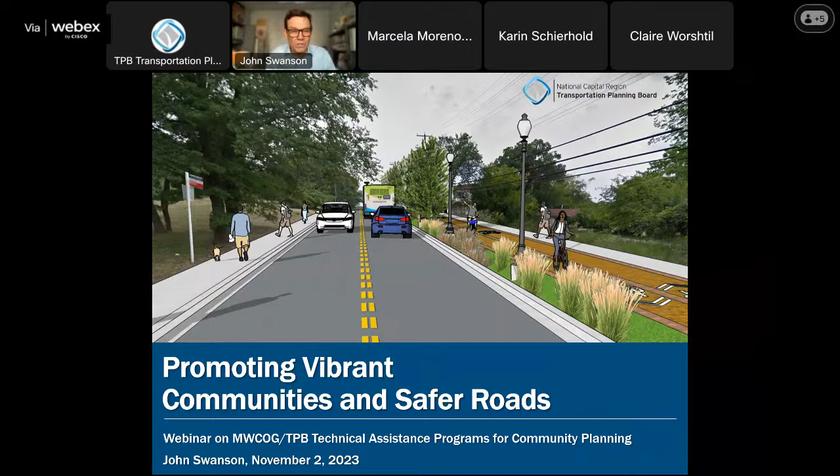Hi, I want to welcome you all. I'm John Swanson, I'm a transportation planner, and I work for the National Capital Region Transportation Planning Board here at the Metropolitan Washington Council of Governments. We are absolutely delighted that you've decided to join us today to hear about some recent projects that promote vibrant communities, active transportation, and safer streets.

We're going to be talking about the TLC program, as many of you are familiar with, but also a couple of newer programs, the Regional Roadway Safety Program and the Transit Within Reach program. The session is going to use a format called pecha kucha, which is Japanese for chit chat.

The format is a little bit like a conveyor belt, and it's a little nerve-wracking. Each speaker has 20 slides, and each slide will automatically advance after 20 seconds. So my presentation is using that pecha kucha format right now. This is the second time we've done it. It's fun, and it's a little bit nerve-wracking, as I said, but it definitely keeps things moving.

So, getting started with our programs. The TLC program was started in 2007. We have funded 177 projects until now. We have 10 that are going on currently. And as a whole, we think they've made the region a better place—more livable, more walkable, more multimodal—and they've helped local communities in countless ways.

The program has its origins in regional planning. We're a regional planning organization, and 20 years ago we were looking at big picture questions for metropolitan Washington. What if more development was concentrated and was mixed use? What if we built more transit and sidewalks and bike paths? Our analysis found that large-scale changes like those could make travel conditions better, but as many of you who are planners know, when we spoke to the public about these ideas, they had very practical concerns.

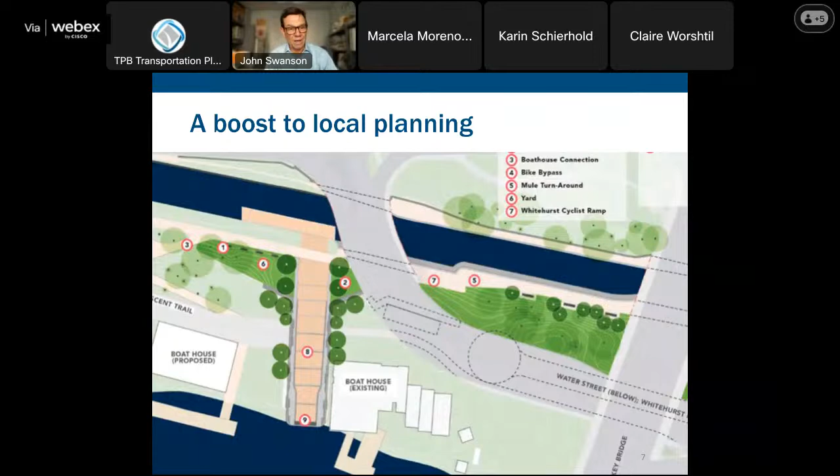We also saw that planners need a little extra boost to make good projects even better, or to explore innovative ideas or move important but non-urgent work off the back burner. So thus was born in 2007 the Transportation Land Use Connections Program. We use a very simple model. These are consultant-led projects, quick turnaround, 6 to 8 months, and pretty small, up to $80,000. We fund planning or design.

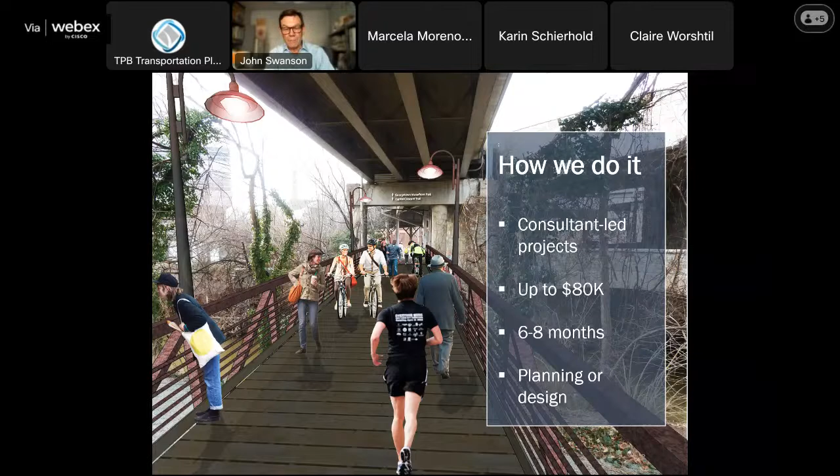A few years ago, we set up a sister program to TLC, the Regional Roadway Safety Program. It uses the same model, and we're going to be hearing about one of those projects later in the presentations. We hire consultants to do planning or preliminary engineering work. Again, the goal here is to plan projects that are going to make a real impact in people's lives.

When it comes to safety, that is really a pressing concern. I think a lot of us know that safety trends have not been going in the right direction in recent years. Fatal crashes on our roadways have increased each year since 2015. This was a reversal from the decline we'd seen between 2005 and 2013. And this is a national trend, not just a local trend.

A few years ago, we funded and conducted a regional study that identified strategies to reduce fatalities and injuries. Based on those strategies, we established the Regional Roadway Safety Program to fund short-term projects to make our roads safer, particularly for people who walk and bike.

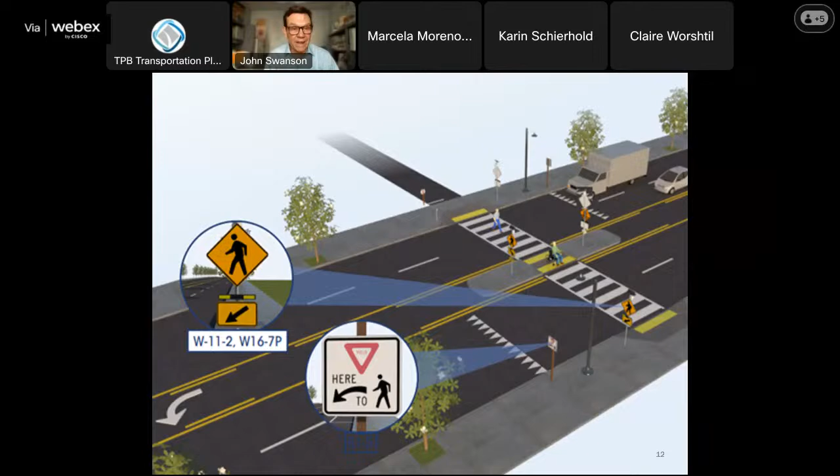So in the past few years, we funded 22 projects that take very practical steps, like you can see in the picture here: planning for infrastructure improvements for intersections, sidewalks, lighting, signage, designing new guidelines and standards at the jurisdictional level, conducting safety audits, and analyzing crash data.

Finally, I'm going to tell you just a bit about a third program, the newest, Transit Within Reach, which we just set up a couple of years ago. The idea for this one is simple. In principle, in this region, trains and buses should be within reach for lots of people because more than half of the region's job growth over the next decade is expected to be within a quarter mile of high capacity transit. And yet, even where transit is physically close, it's often not within reach if you walk or bike.

Sidewalks are missing, crosswalks are unsafe, trails and paths are yet to be built or inadequate. So the Transit Within Reach program was set up to fund preliminary engineering or design for pedestrian and bicycle improvements. Again, we're using the same model of technical assistance that we use for TLC. Our board just approved 3 new projects, and you can check those out on our website.

As you can see, these programs fund local projects, but I really want to emphasize that these are regional programs. That's why we're hosting this webinar. We want to share information, and that's why we have developed this awesome new database, which has just gone live in the last week or so, where you can look at all of these projects. You can search by primary topic and download the reports and really dig deep.

I also want to mention an important announcement. Every year we do a solicitation for applications for the TLC program and the Regional Roadway Safety Program. We're combining those application processes again this year. It's going to be in January and February. There's an abstract opportunity if you want to try out an idea.

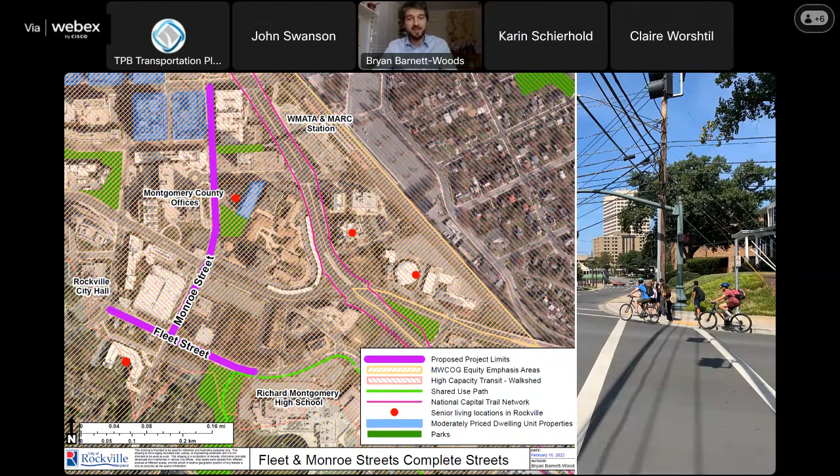So let's begin. How did we choose this project? This project is close to town center and the Rockville Metro Rail Station. It's within an equity emphasis area and a high capacity transit walkshed. You can see the streets in purple, Fleet and Monroe. They connect to the Metro, a future BRT stop, the County Executive Building, Richard Montgomery High School, Mount Vernon Park, Rockville City Hall, and a trail that connects to the Carl Henn Millennium Trail. So this is really great for multimodal access.

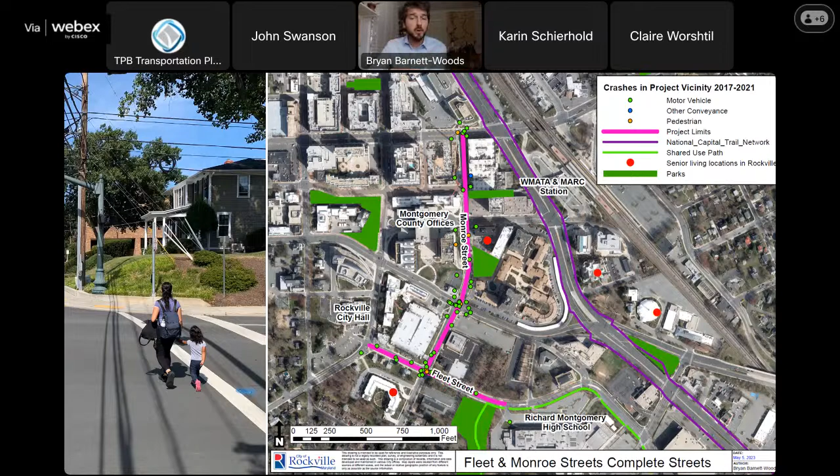The green and blue dots here show crashes that occurred between 2017 and 2021. There wasn't a fatal crash, but there is certainly room for improvement for all modes. Fleet Monroe regularly receives service requests from the public related to motorists not yielding and pedestrian and speeding from pedestrians. So adding complete streets has a safety benefit as well.

What are our project goals? First, what complete streets improvements can be made? And we want to make sure they're made and it's a functioning transportation network. And if that's possible, what will they look like?

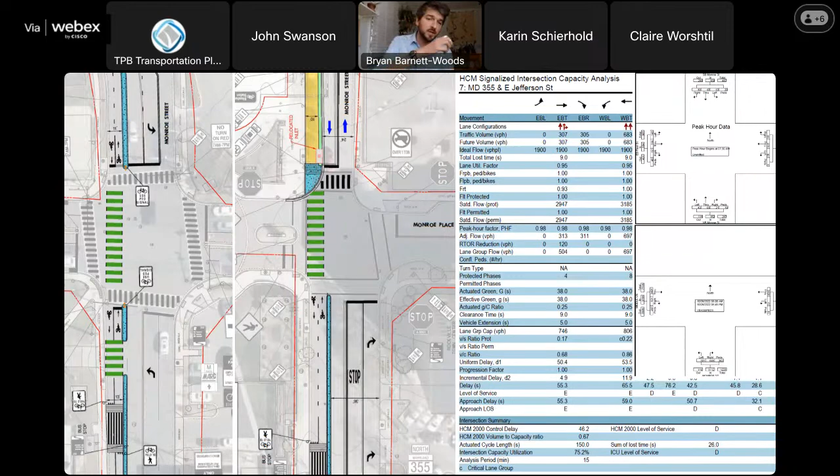This leads to two straightforward deliverables. The first is a traffic impact analysis, which you can see on the right. If we plan to implement any complete streets improvements, how will it impact the roadway? Will intersections fail? The second is, what are the conceptual plans for alternatives? What would the project look like on the street? Both are important. We need to understand traffic for public buy-in. We need the concept plans because they'll show us how much road space we need.

So for the analysis, we looked at turning movement counts, pedestrian counts, bicycle counts, right-of-way availability, sidewalk, roadway lane widths, vehicle delay, queue lengths, all of it. It turns out that there's additional capacity along these roadways. We also looked at on-street parking, and there is some street parking on both streets that would be impacted.

So what do we find? The biggest issue here, right-of-way constraints, are really going to limit what we can do. The city doesn't have the ability to obtain more right-of-way, and the travel lanes are only 11, 12 feet wide, so not a lot of extra space to play with. Good thing there's extra roadway capacity, because this means the best way to make improvements is to repurpose a motor vehicle lane. And how do we do that?

The first option is a bicycle path that's up on the curb. This is more like what we think of a shared use path, and you can see actually in the little picture as a person and a bicyclist. But keep in mind, this pathway is in addition to the sidewalk. It's bidirectional and it would run alongside the south side of Fleet and west side of Monroe.

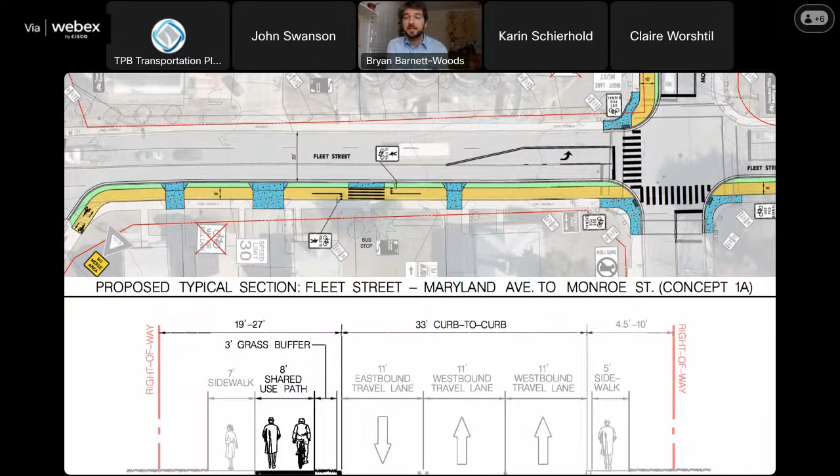The other alternative is a bidirectional cycle track. This is similar to some of the bike lanes they have in DC. Like the path, it would be on the same sides of Fleet and Monroe, but it's slightly wider and it's within the curb to curb on the street.

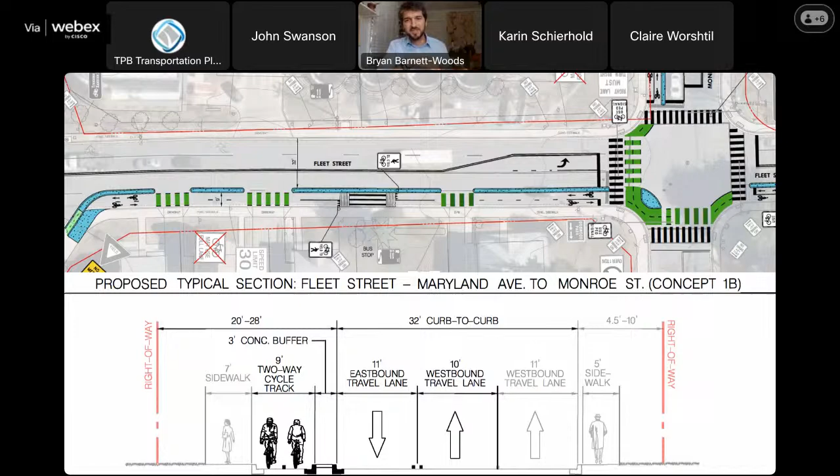So this is an on-street facility, which means it's going to need intersection differences in signals to help advance those bicycle movements. These proposals are similar. The right-of-way constraint is real, and there isn't enough space to provide protected lanes on each side of the street, which might be the preferable option. A standard striped bike lane could fit, but it wouldn't address bicycle safety needs.

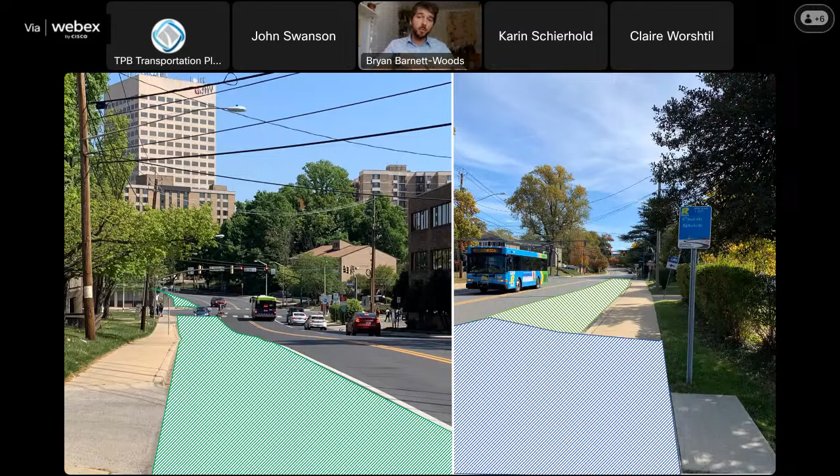So here, the green is what it looks like if we were to repurpose a lane. The blue is where an extended and at-level bus stop would be. But the projects do differ at some key points. First is cost. A new path is more than double a cycle track. Second, a bike path would impact more driveway aprons and drainage inlets. And then lastly, the path option would have less complicated signals at the intersections than the cycle track would.

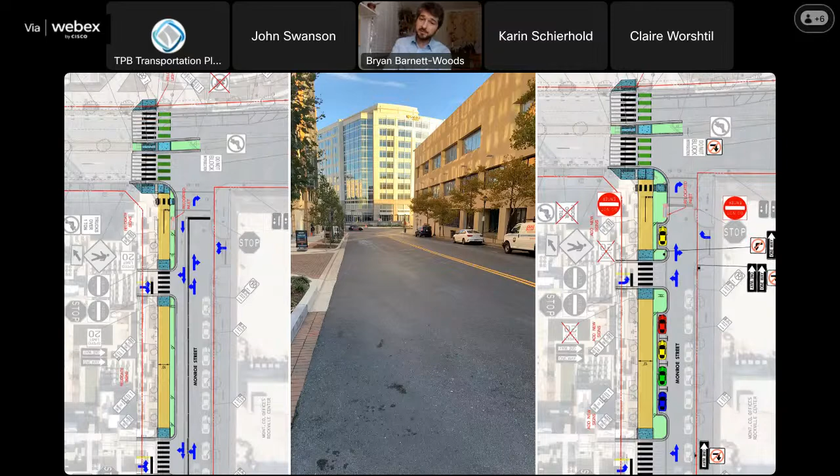On top of these options, there's a subset of options for the northern end of Monroe Street, which we see here. There's very low traffic on this street, so there's an option to make this section one way. This would allow for 5 parking spaces to remain, which you can see on the right. Alternatively, we can remove the parking lane and keep the two-way traffic.

We coordinate with other agencies, and this is important because we want everyone to be on the same page, and since the city can't modify non-city intersections, we need their concurrence. We work with Montgomery County Department of Transportation Ride-On, their transit service, and the State Highway Administration, who own the Monroe-Jefferson intersection.

State Highway doesn't yet have approval for a bicycle traffic signal, so we need a more complicated signal phasing to advance bicyclists. There are options, but we really do need to take a deeper dive to figure it out.

Ride-On, the bus service, requests that all bus stops be wide, at-level bus stops so that both doors can be accessed, and that bicyclists yield to pedestrians.

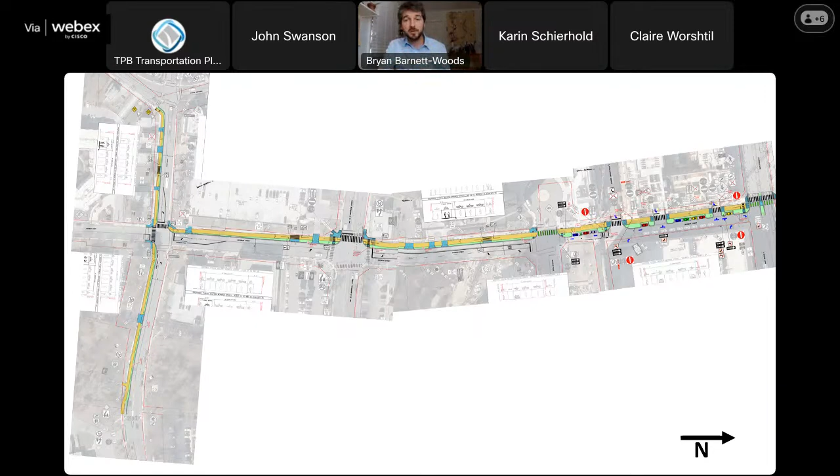So now that we have a preferred alternative, what's next? With the support of MWCOG, we were awarded funds for the FY24 Transportation Alternatives Program to undertake 30% design. This project will prepare preliminary design plans, look at that East Jefferson and Monroe Street intersection, and put together a much more detailed cost estimate. This is all information we're going to need if we want to move this project to future design and implementation.

In all, this project will put the metro station, the bus facilities, the future BRT closer to town center, county offices, residents, and a high school. It's going to leverage surrounding land uses to create a better multimodal transportation infrastructure. And with that, I thank you for your time, and I'd be happy to answer questions.

Thank you, Bryan. Excellent. We're going to actually hold questions to the end, keep things moving. That was a really great intro to the work you're doing in Rockville, and also to the TLC program, the Regional Roadway Safety Program.

This is really a very clear example of a typical project that we do to build vibrant communities and leverage a lot of other work that's going on out there. So we're going to move now to a less typical project. Every year or so we fund one or two really innovative projects, and I think the next one is a great example of that. It's looking at micromobility and a micro hub, and looking at freight particularly. This is something that came to us, and it was a little bit out of our normal bailiwick, but I'm certainly very excited to fund this.

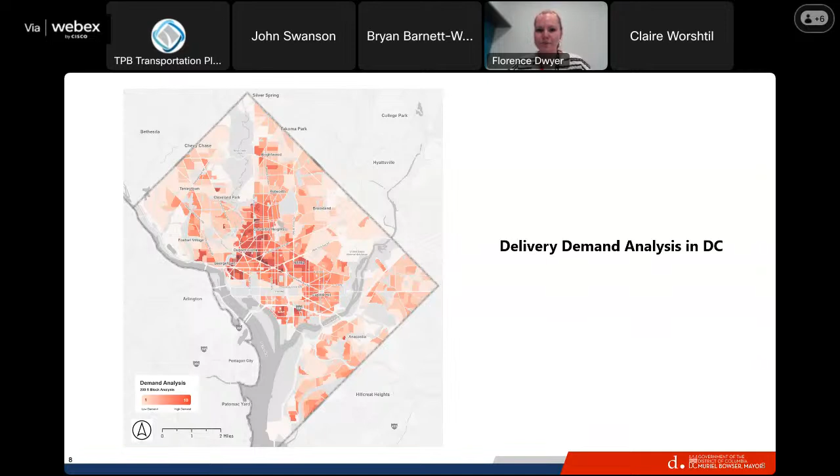These next few slides show maps from the siting analysis. This first one shows the composite delivery demand analysis scores, which estimates the frequency and quantity of delivery requests based on factors of population density, employment density, and housing unit density.

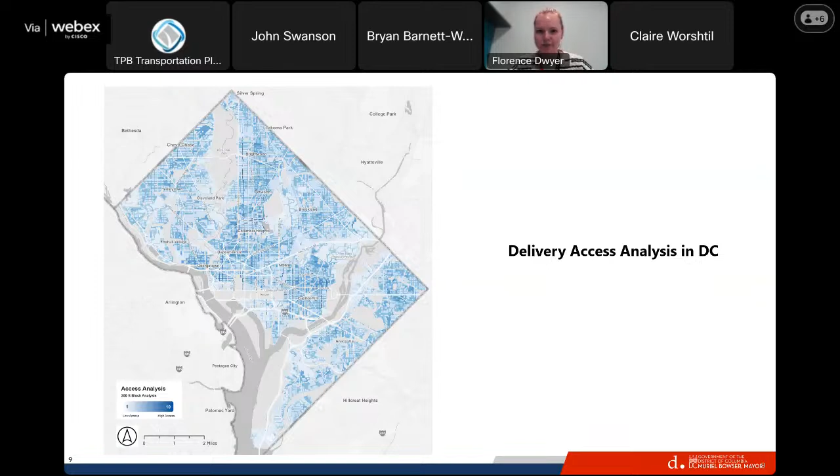This composite delivery access analysis score estimates the ease of how deliveries could flow in and out of certain areas of the city. Because a microhub is meant to have an inflow of larger vehicles bringing parcels to the hub and an outflow of smaller vehicles picking up parcels and delivering them to their final destination, the hub must be located where it's both convenient for trucks and large vehicles to drive, and safe and convenient for smaller vehicles to finish the delivery.

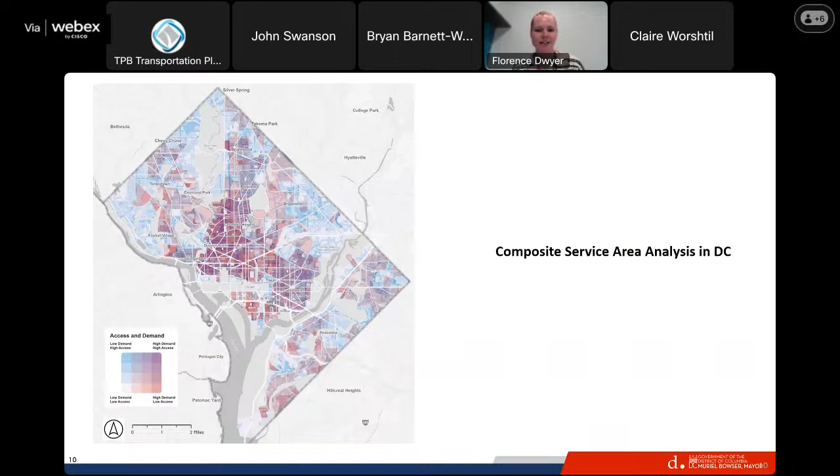This composite service area score combined both those access and demand variables to show where the highest demand score corresponds with the highest access score, and those are the areas shown in purple there.

Finally, we have our equity map. We decided equity is also important to consider in the site selection process for this project. This equity consideration analysis shows areas of the city identified as high on the transportation needs index by MoveDC, with high instances of asthma and reported high concentrations of diesel particulate matter.

Now on to some of our findings from this study. One was that microhubs work best for deliveries that are non-perishable, small in size and weight, and have a short last mile delivery trip. Because of this, parcel deliveries were determined to be the best use case for a microhub in the district. Another finding from our consultation with stakeholders and best practice research was that delivery companies do not want to share microhub space.

They want their own dedicated space. Additionally, we found that in an ideal world, a microhub would be around 8,000 to 10,000 square feet. This would give adequate space for loading and unloading of a truck or van, vehicle parking and battery charging, and employee amenities like restrooms, locker rooms, a kitchen area, office space, and other storage needs.

Diving into our next steps: throughout this fall, we're continuing our efforts to select a site for the microhub and create an operational framework for this pilot. This feasibility study was funded through a TLC grant, and we got additional grant funding to try to implement this pilot. Now we're hoping to go through any necessary permitting processes and onboard an operator this fall and into the winter, with our goal being implementation of a pilot in early 2024.

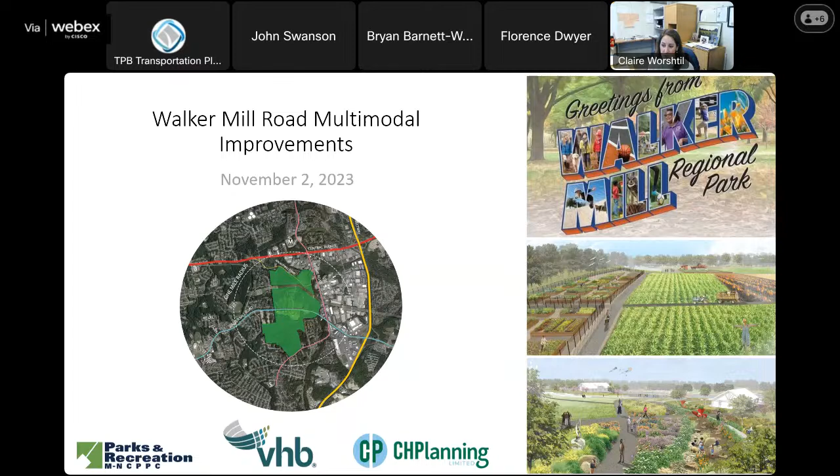Walker Mill Regional Park is one of 4 existing regional parks in our system. We completed a master park development plan for Walker Mill in 2022. Walker Mill is the only regional park located inside the Beltway.

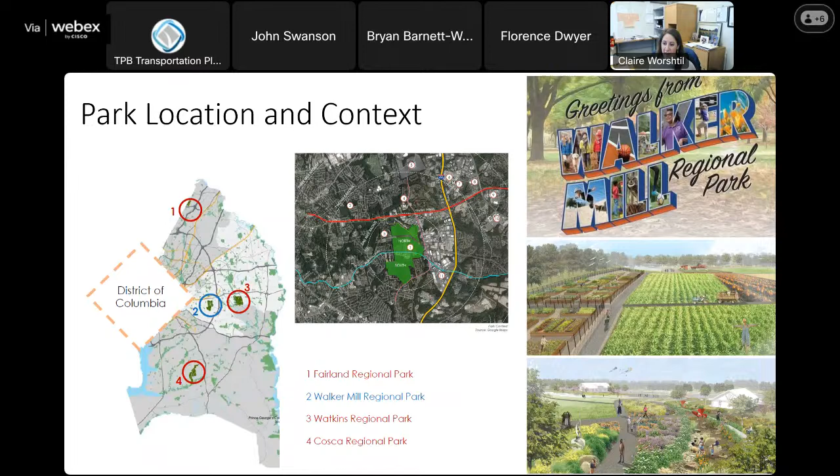It's 504 acres, divided roughly in half by Walker Mill Road, and a master plan for the south side of the park was completed in 2004, and that side's undergone a multi-million-dollar renovation over the past 10 years. This master park development plan largely focused on the undeveloped north side of the park. The only existing amenities on the north side are the historic Concord Manor House and a small community garden.

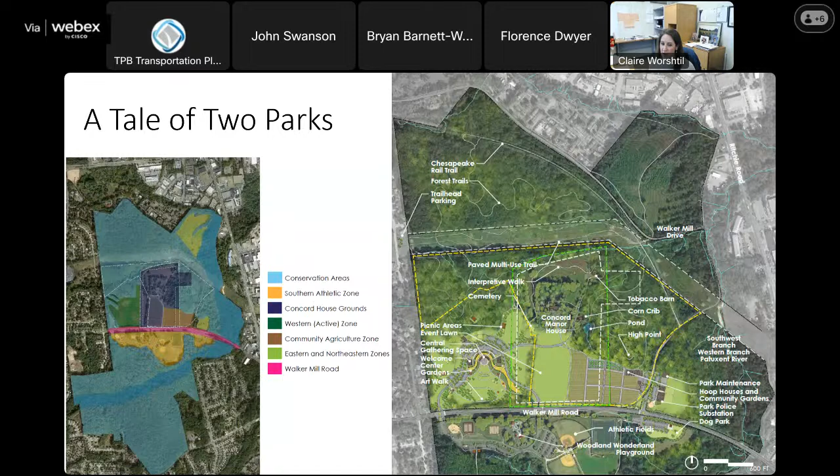The plan divided the park into activation zones and identified Walker Mill Road as its own activation area, as it divides the park and is the only major access into the park for cars, bicyclists, and pedestrians.

The Concord Museum will share the history of the park as the plantation, as well as the enslaved who lived there and worked on the property.

In order to advertise and enjoy this historic setting, slower speeds, ornamental fencing, and gateway signage are ideal elements along a roadway. A comfortable walking environment is also important, as only accessible parking will be provided on site. All other parking will be located away from the historic property.

The plan is to maintain the historic uses and viewshed by building upon a historic agrarian use for the land and created both a community garden and an urban ag zone. This will generate additional traffic to the park on weekends for the envisioned farmers market.

And the western zone will probably be the most active part of the north, where we envision a visitor center, ample parking, botanical gardens, large pavilions, and spaces for entertaining and play. This is the area that will see the most traffic to the north coming through its roadway entrance.

Finally, the robust trail system is what ties all of this together. There are approximately 9 miles of new trail that will take users through various sections of the park and connect to surrounding communities. The trail also takes advantage of the Pepco easement, which has some ideal terrain for mountain biking, as well as the Chesapeake Beach Rail Trail.

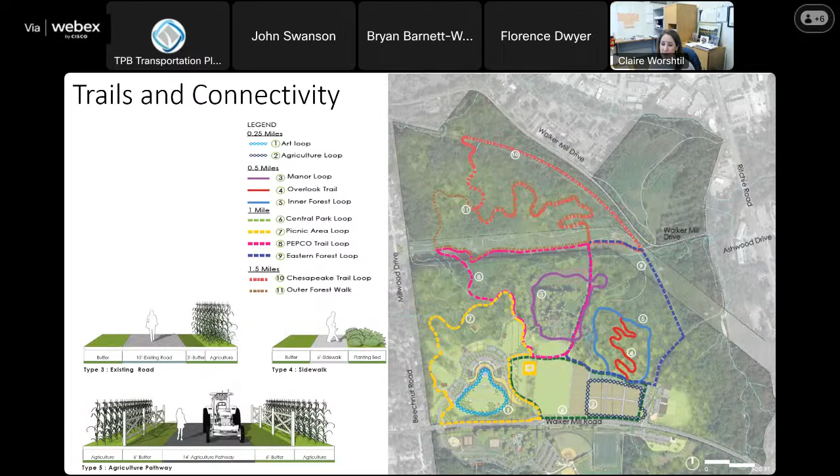This makes it even more important for residents to be able to access this park safely by bicycle and on foot. Walker Mill Road was built for vehicular traffic with limited sidewalks and an unprotected bike lane and cars that travel at very high speeds.

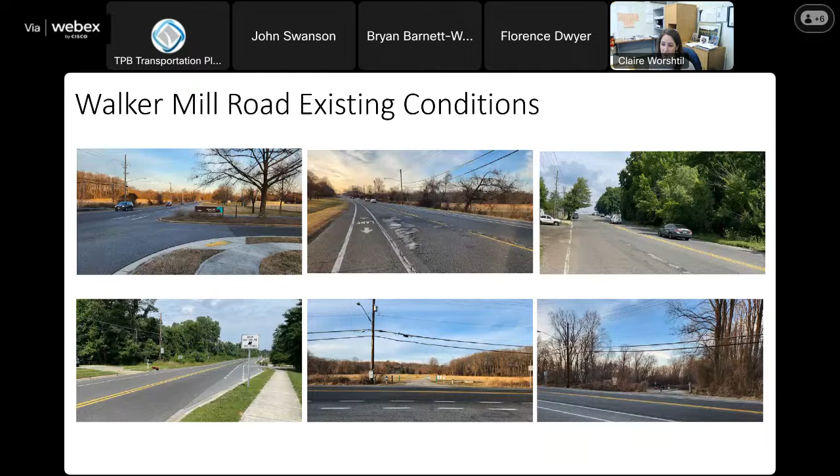As we activate the north side of the park, it'll become common for visitors to want to walk from the active side on the south to the more passive and reflective uses on the north. Bicycle and pedestrian safety is essential for this park's long-term success.

The plan envisioned a gateway to alert drivers that they're entering a park setting. Additional traffic calming measures like hawk signals, protected bike lanes, pedestrian lanes, and roundabouts were also recommended.

But we needed a skilled team of experts to help us take this key component of the park to the next level and really understand the constructability of these recommendations.

So the team broke their recommendations into short-term and long-term recommendations. Things like roundabouts and traffic signals take a long time to construct, and we need solutions that we can implement more immediately while waiting for more substantial funding.

They also included information on coordination complexity, as some require multiple entities to implement, and the stakeholders who will need to be involved. Short-term recommendations included the installation of additional signage and markings, creation of protected on-street multi-use paths, gateway signage

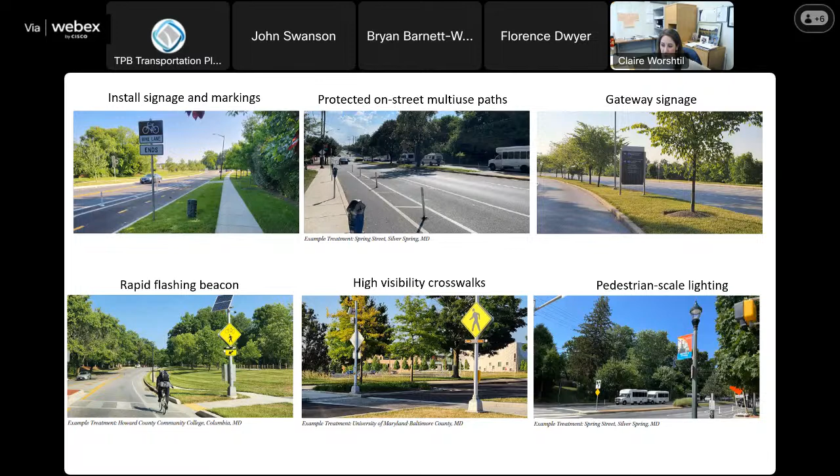to alert vehicular drivers that they're entering a park setting, rapid flashing beacon for pedestrian crossings, high visibility crosswalks, and pedestrian scale lighting to enhance safety.

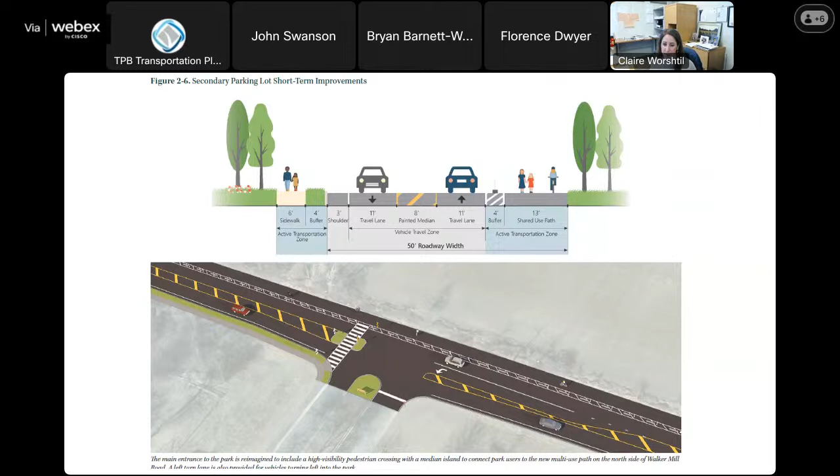With travel lanes narrowed to 11 feet in width to create the shared use path, additional width is available for widening the existing sidewalk on the bridge.

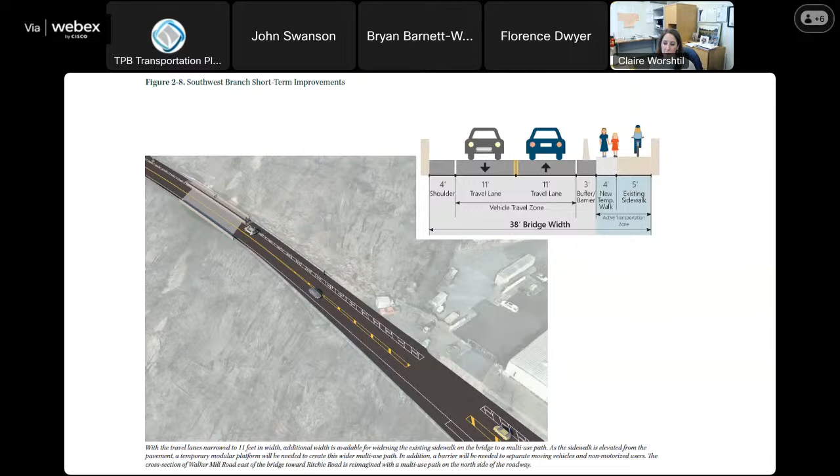As the sidewalk is elevated from the pavement, a temporary modular platform would be needed to create a wider multi-use path. In addition, a barrier will be needed to separate the moving vehicles from the non-motorized users. This will help residents get from the commercial areas to Walker Mill Regional Park.

We can then consider the long-term recommendations.

These recommendations generally will require 5 years or more to implement because of the high cost, level of design and construction complexity, and level of coordination needed among various agencies. They include the installation of traffic signals, construction of 2 separate roundabouts, a right-in, right-out entrance, a separate pedestrian bridge to the east, and off-street multi-use paths.

The plan doesn't recommend a menu of solutions, but recommends that all of them be layered and implemented over time in order to create the best multimodal experience possible.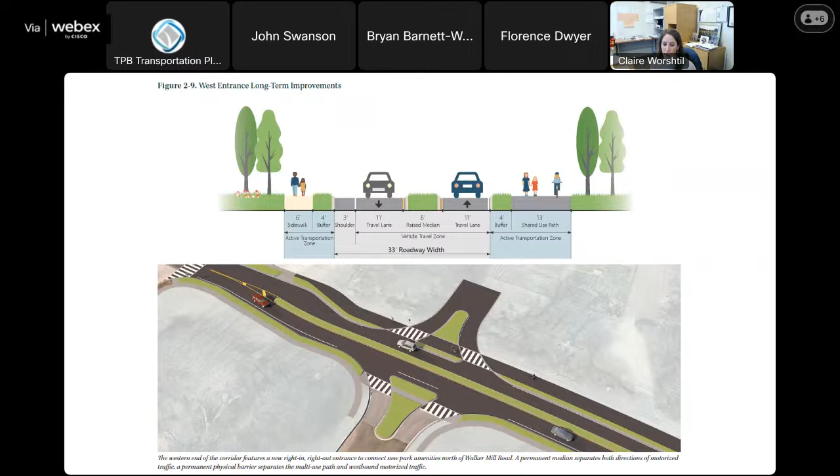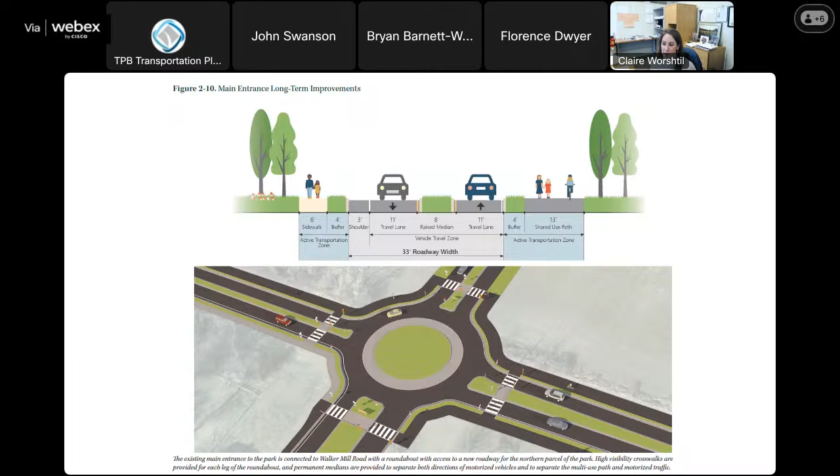The raised median area could also become tree lined, further enhancing the aesthetic of the park.

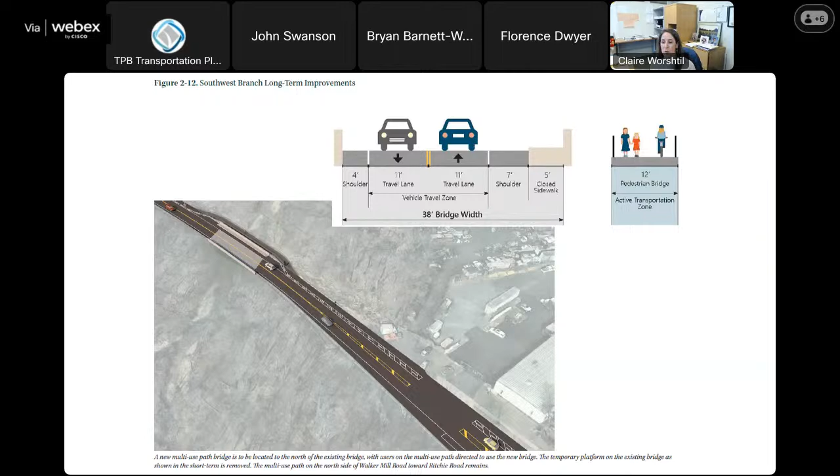And finally, a new multi-use path bridge is to be located to the north of the existing bridge, with users on the multi-use path directed to use the new bridge. The temporary platform on the existing bridge, as shown in the short term, would be removed. This would essentially take users off of the roadway for the extent of the bridge and then back onto the roadway.

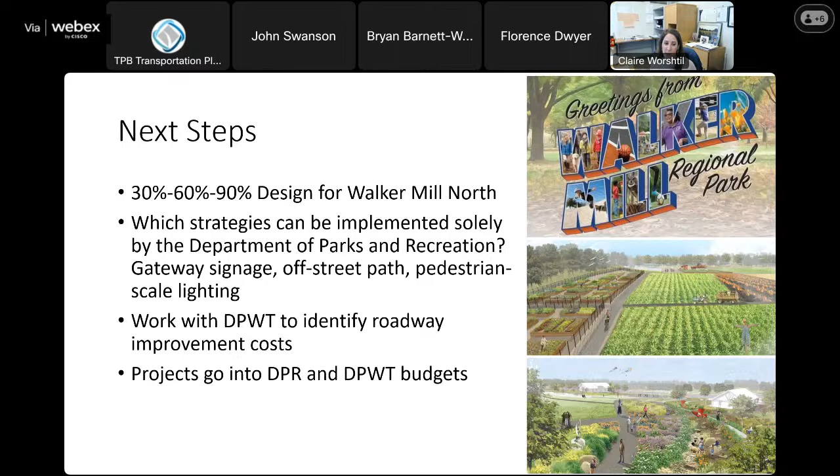Our next step in this process is to engage a design team to take the master plan for the entire north side to 30%, 60%, and then 90% design. As we do that, we'll begin to implement strategies that can be solely implemented by the department because the upgrades happen on our property. This might include gateway signage, building on and off street paths, adding pedestrian scale lighting, and then we'll work with DPW&T to identify costs for some of these improvements and identify which agency has responsibility to fund them.

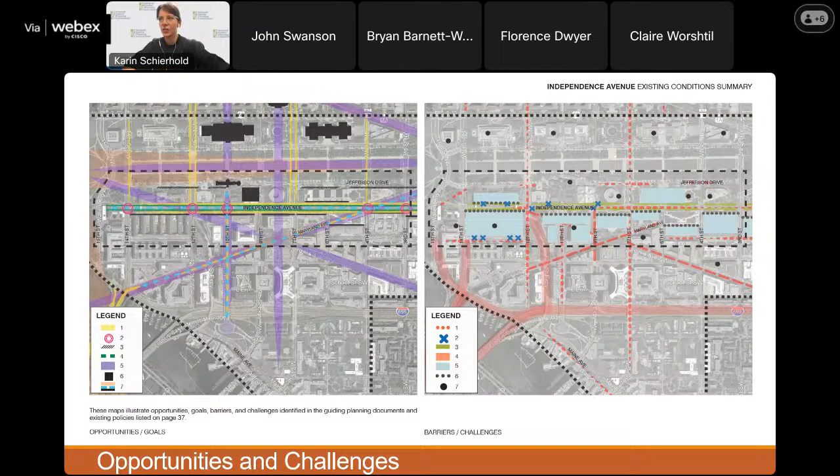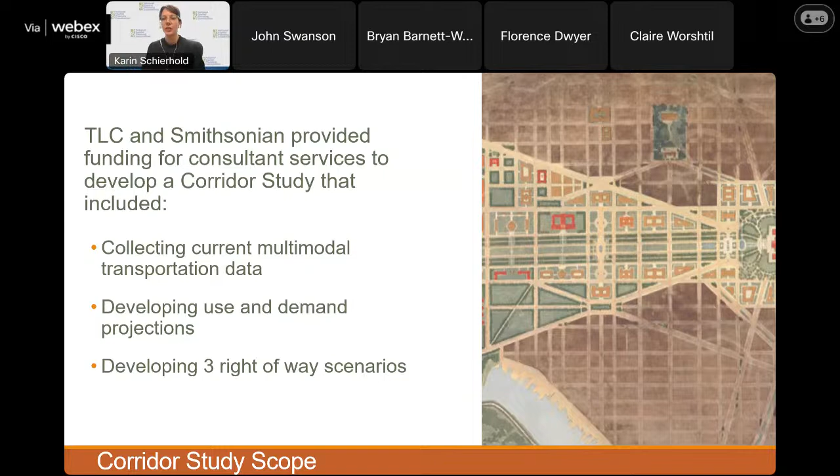So NCPC started doing some initial background work on Independence in 2019, essentially an existing conditions report, and we held a few stakeholder workshops to identify some of the opportunities and challenges in the area. With that base of understanding, DDOT and NCPC applied for TLC funding to support data collection as the first step. So these consultant services were to develop a corridor study that included collecting current multimodal transportation data, developing use and demand projections, and developing 3 right-of-way scenarios.

Objectives included identifying strategies to emphasize the avenue's unique character, ensure high-quality streetscape, and prioritize resiliency and sustainability, as well as safety and multimodal comfort and access. The study area is, again, Independence Avenue Southwest between 15th and 3rd. That includes intersecting streets, basically a block north and south of the avenue.

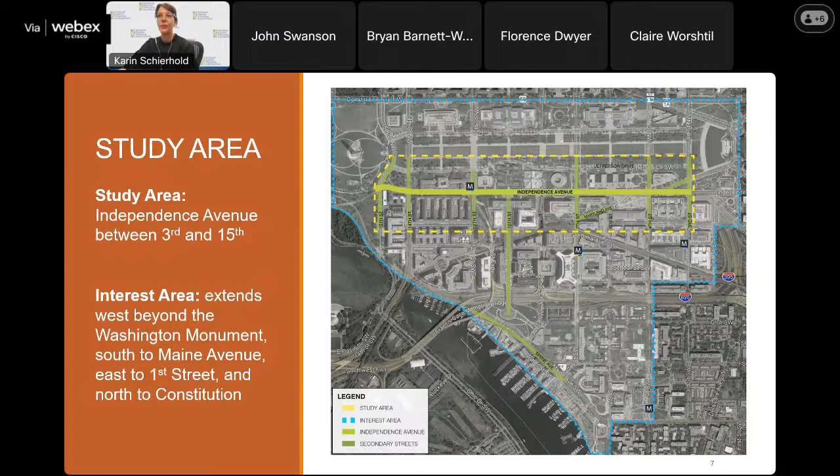We also considered specific intersections and connections within a wider interest area for their impact and influence on Independence Avenue. Kittelson started with an existing conditions analysis that used a synthesis of historic and current data to help inform this mid-to-hopefully-post-COVID scenario we're in.

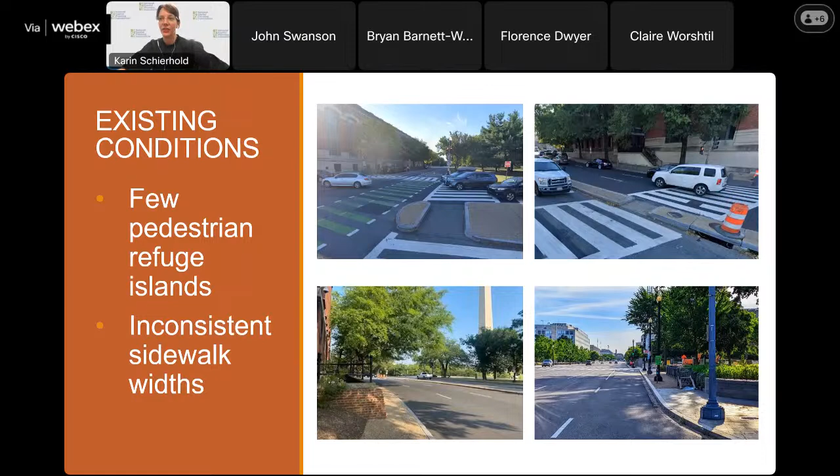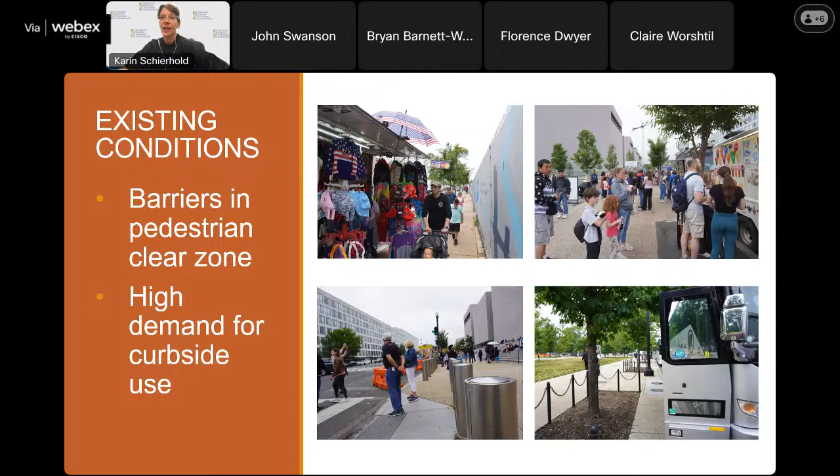Regarding the pedestrian experience, they found that intersections are generally very long with not a lot of pedestrian refuge, and sidewalk widths are inconsistent with several pinch points along the corridor. There are also barriers in the pedestrian clear zone due to construction, perimeter security, and vending, plus a very high demand for curbside use with tour buses, rideshare, pickup/drop-off, and vending all competing for space. There are currently no bike lanes, and due to a pretty meager tree canopy in places, there's not a lot of shade. Finally, it can be hard to navigate if you're not familiar with the area—there's no cohesive signage or wayfinding program.

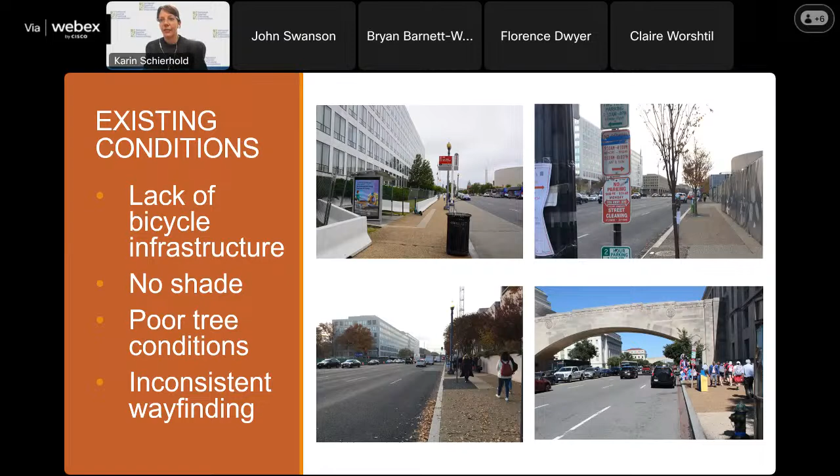Independence today is 8 lanes, 4 in each direction, with no bike lanes on this stretch. Sidewalks here average about 10 feet, and in some cases narrower, and many times the tree boxes and other streetscape elements are part of that area, which leaves even less room for a pedestrian clear zone.

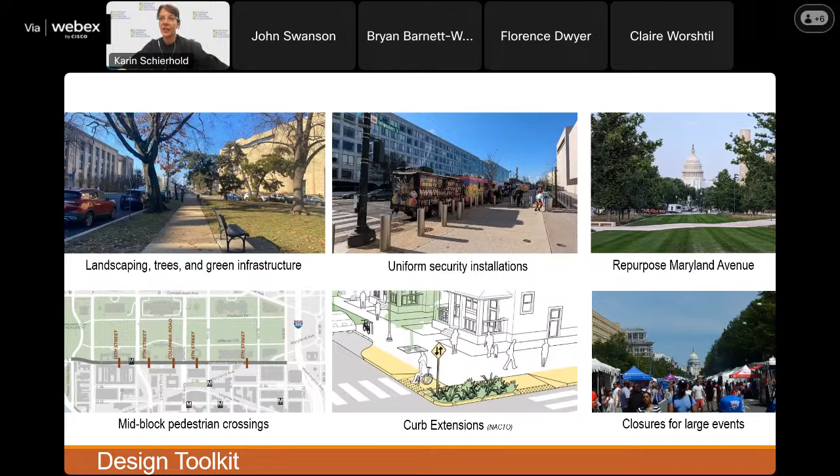Kittelson found that based on the data, Independence actually carries the load of a 4-lane roadway, meaning there's an opportunity to consider repurposing some of those existing travel lanes and reconfiguring the corridor's cross-section to prioritize non-motorized users, including biking, walking, using micromobility, and accessing transit. They also developed a toolkit of ideas to make the avenue more pedestrian-friendly and safe.

With that in mind, they developed 3 general right-of-way scenarios. Each scenario proposed a reduction of 2 lanes, maintained or increased the tree canopy to have a consistent double row of trees on each side, and left room for a left turning lane.

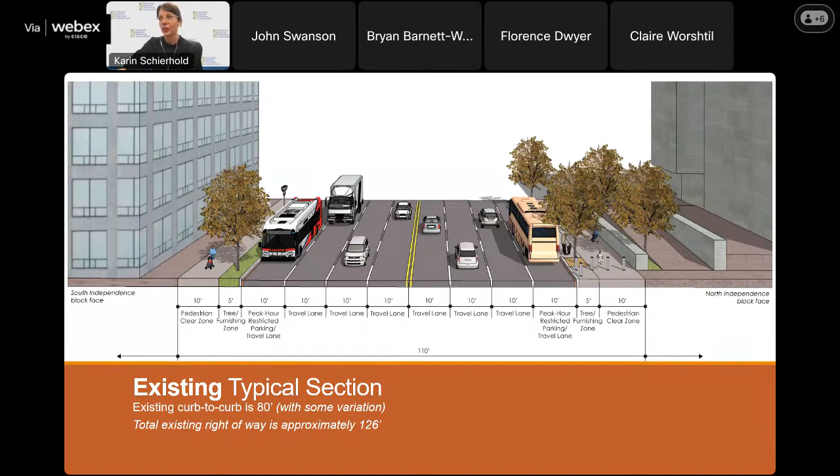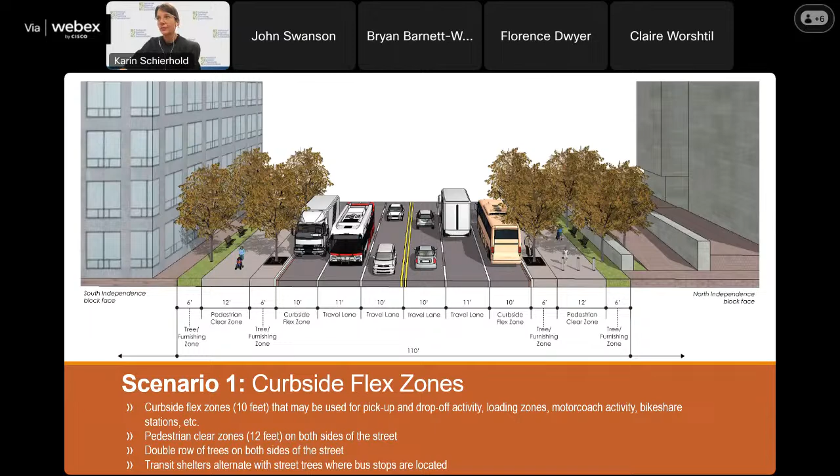They also looked at accommodating curbside uses and increasing green space and bike lanes. One scenario looked at enlarging the pedestrian area, keeping 2 through travel lanes, incorporating a flex zone that could accommodate pickup/drop-off, buses, potential bike share or vending, and maintaining a consistent double row of trees on both sides of the street.

Another scenario looked at using that excess space and putting it into a landscape median that alternates with the left turning lane, and enlarging the pedestrian area at the sidewalks, again with that double row of trees, plus a curbside flex zone.

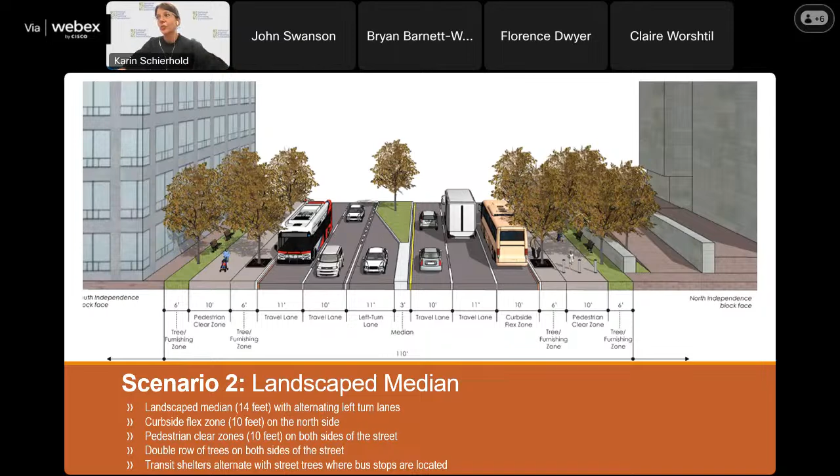They also did a scenario that looked at adding a cycle track at the sidewalk grade, keeping 2 through travel lanes, and some flex zones with additional landscape space. The trade-off being that a bike lane in that location would likely conflict with tour bus loading and vending.

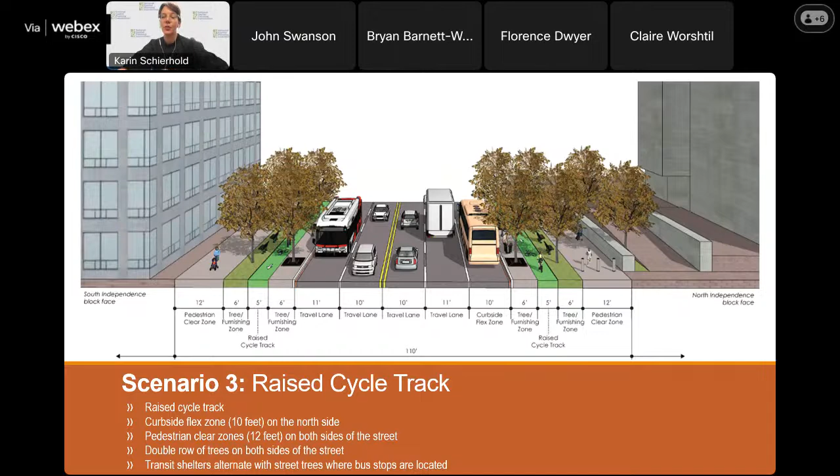This work is still in the very early stages, and since it's a district street, DDOT will be the entity that takes it beyond the feasibility stage. But for the next year, we're very excited to have the opportunity to further develop this study and start to engage stakeholders and build a case for future improvements.

Last month, we kicked off a contract with Kittelson to do another year of study and expand our understanding of the block-by-block needs along Independence and test some of these right-of-way scenarios. Smithsonian is also generously contributing funding to this effort.

This next phase of work will build on the TLC-funded study and develop a deeper understanding of the corridor by conducting an initial public life review to measure how the street is used, identify and hone in on curbside issues including loading and delivery zones, rideshare, and tour buses. We'll further detail the demand and flow data and analysis collected in the first study, which will help coordinate stakeholder priorities and start to establish a unified vision for the corridor and support for future improvements.

So that is Independence Avenue, and I'm happy to follow up or answer any questions after. Thanks.

That's great and super exciting. I think looking forward to seeing that real change happening in the hopefully fairly near future there. So—

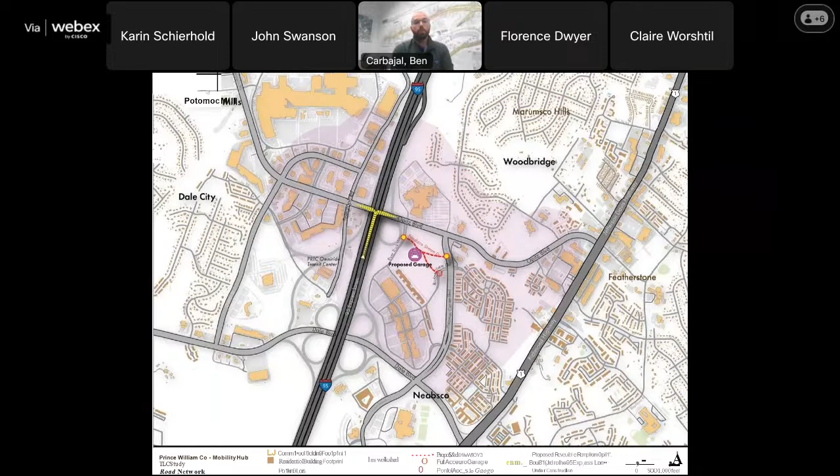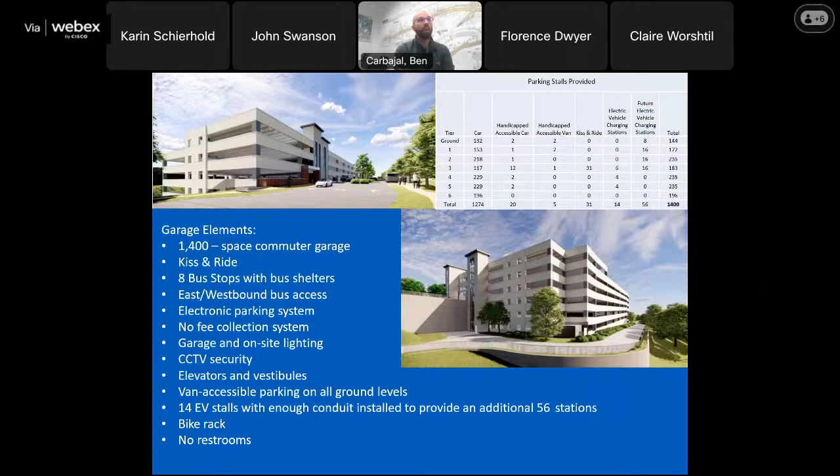The garage project is currently under construction with crews working to finish the foundation before the end of this year. The project will provide several amenities, including being OmniRide's transit hub for the region, free access to park, EV charging stations with expansion upon need, elevators and vestibules, van accessible parking on all ground levels, bike racks, and other pedestrian facilities.

The 95 Opitz project is constructing a south-facing ramp within the existing median on 95. We're excited about this project as it provides pedestrian improvements along the north side of Opitz Boulevard, safely reconnecting communities divided by 95.

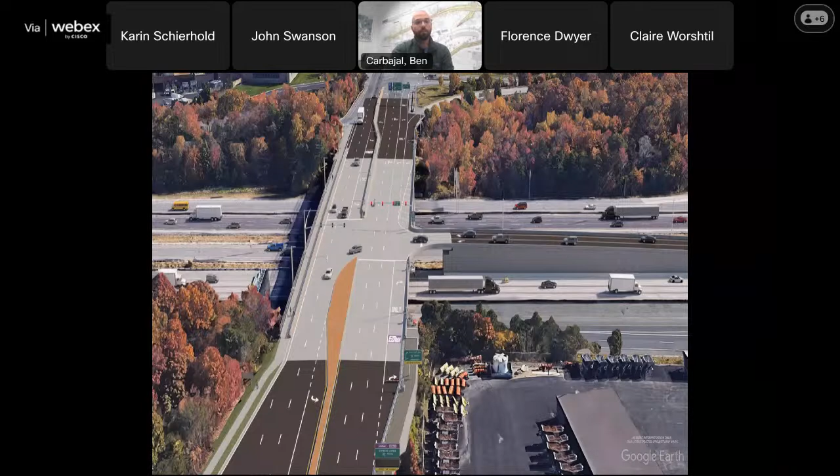The study area includes several census tracts designated as an equity emphasis area while also being in an activity center. The demographics concerning this study impact how we move forward with the recommended improvements.

I don't have time to go into each one, but based on 2019 census data, there is an average population density of 3,100 people per square mile. The town center has a density between 5,000 to 10,000 people. 99% of individuals who commute to the study area do not live within it. Furthermore, there is a significant population with limited or no access to a vehicle, making quality transit infrastructure essential.

Understanding mobility safety is critical for the county to decide where to prioritize improvements. As you can see, from 2015 to 2022, there have been several accidents, including 2 fatalities, along Opitz Boulevard and Dale Boulevard.

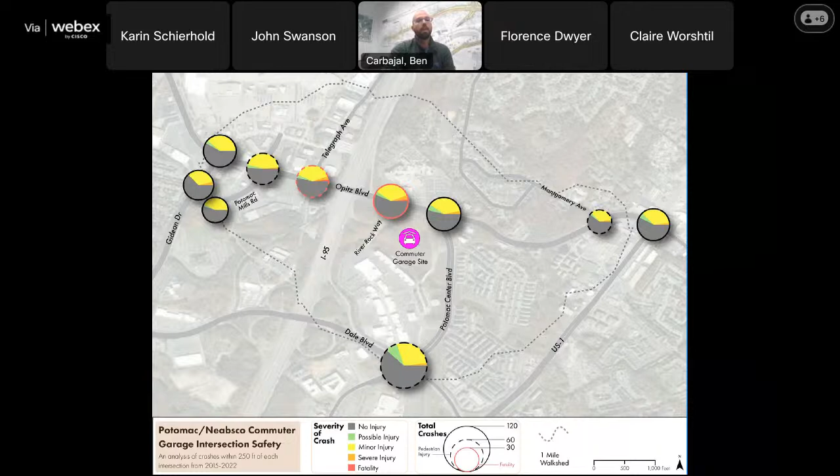Though most streets have sidewalks or shared use paths, there are gaps in connectivity, especially around Opitz Boulevard. Opitz and Dale crossing 95 are very uncomfortable and recommended to avoid for cyclists. There are bus stops along Opitz to the east of the garage with only street access.

With all the capital improvements occurring in the area, the county is actively coordinating with our partners to resolve these issues. This slide highlights existing pathways in solid green lines and pathway gaps illustrated by purple and blue dashes. These gaps are major hurdles needed to overcome to provide equitable access to these communities. VDOT's ramp project will resolve some of the issues along Opitz Boulevard.

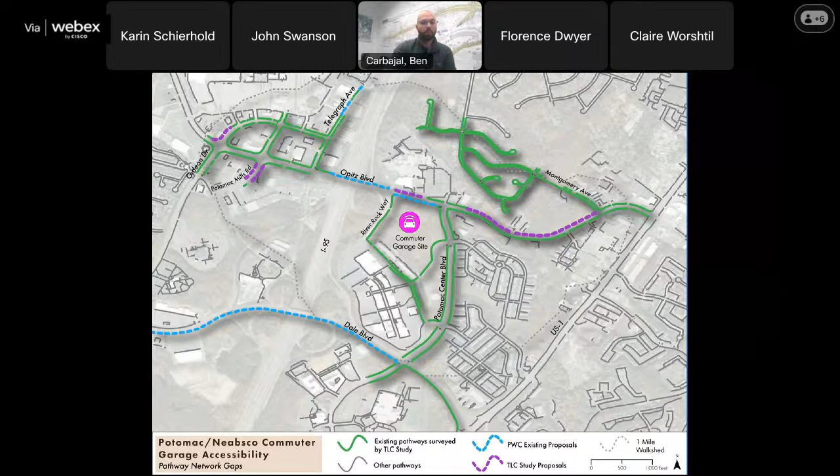This is a similar map to the last one I showed you, but it dives deeper into the planned pedestrian improvements in the area. Outside of the garage and ramp projects mentioned earlier, the county has the Neabsco Mills widening project to the south and the Route 1 widening project to the east. Both projects provide necessary pedestrian facilities.

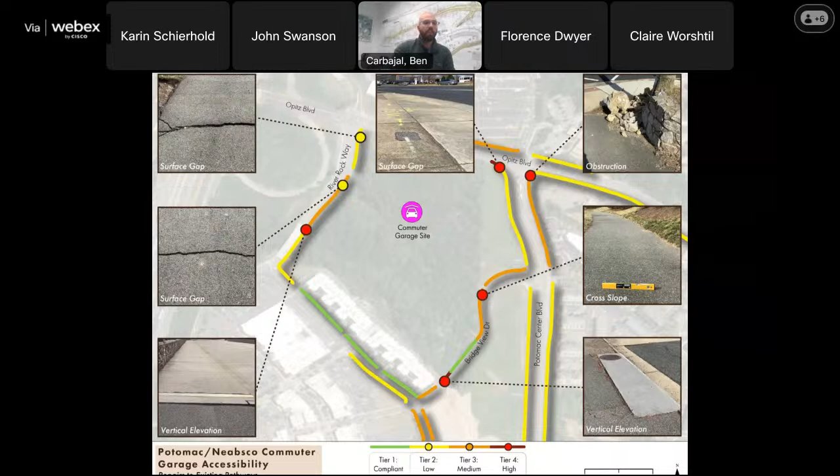KFH spent 2 months canvassing the area, surveying a total of 174 curb ramps, 99 crosswalk segments, and 129 pathway segments. Repairs and reconstruction of the existing pathways are required to meet ADA compliance standards. As you can see at the bottom of the slide, KFH provided a tiered ranking system to facilitate the prioritization process. Intersection improvements are needed throughout the study area to improve safety for all roadway users.

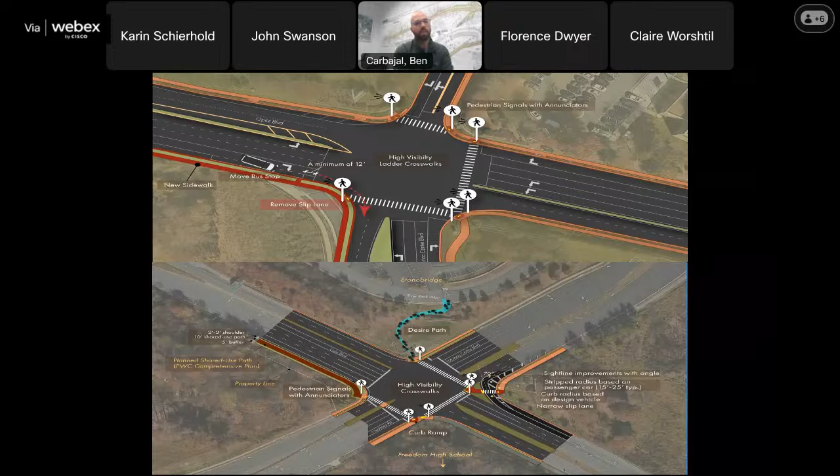Some recommendations include traffic calming, speed reduction strategies, and improving visibility. County staff will coordinate with property owners and VDOT to initiate these recommended improvements.

Going forward with the project is not as direct as seeing an issue and solving it. County staff will utilize this study to best inform the district supervisors to receive buy-in from them before submitting project funding requests to our state and federal partners. Some programs we will apply to in the future include VDOT's Transportation Alternatives Program, USDOT's Safe Streets and Roads for All, amongst others. If necessary, the county will support projects with local dollars.

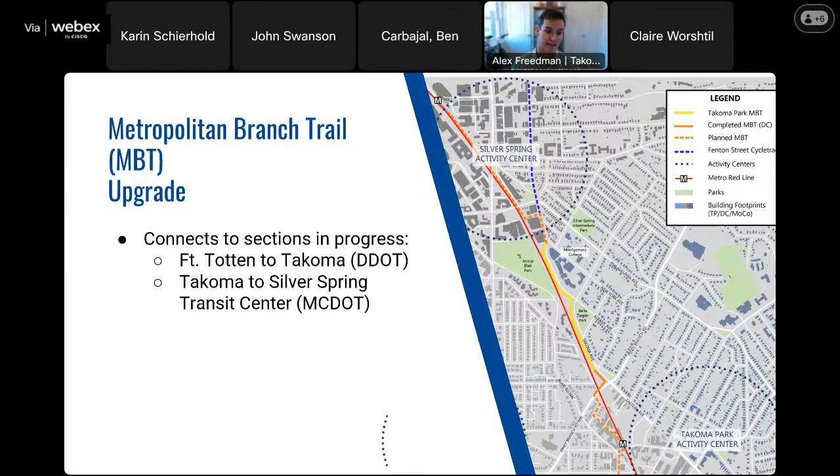The location of our route is visible in yellow on this map. It connects between two sections that are already in progress. Montgomery County is working on a section that will connect from our border up to the Silver Spring Transit Center, and DDOT is working on a section that will connect from our border down to the Fort Totten Metro.

A big piece of our effort in this project was focused on innovating on engagement strategies. These included an informational public meeting, an on-site community walk, and a new yard sign campaign that featured QR codes linking to an online survey.

What we heard back from people was that the trail is narrower than people feel comfortable with, the pavement condition is poor, the lighting is poor, and the split rail fence is starting to fall apart. So what was proposed in the preliminary designs developed out of this was, broadly speaking...

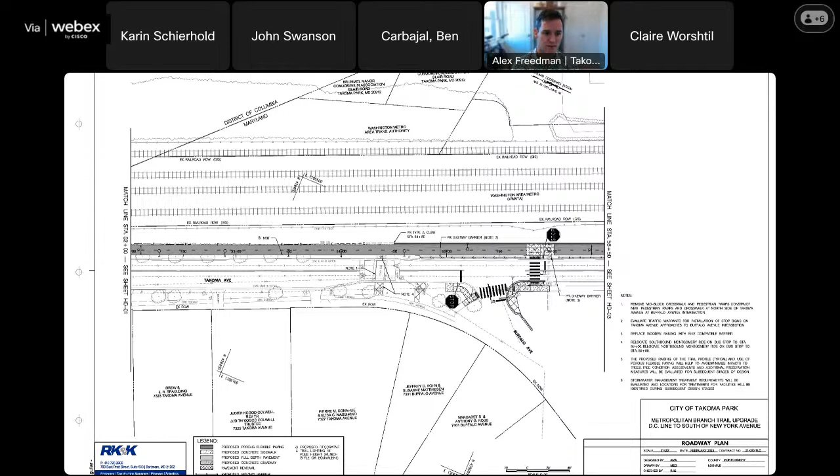A widening of the trail to a modern standard that aligned with Montgomery County's design standards, new pedestrian scale lighting, safer and more useful crossings that connect to the park across the street, as well as new striping and signage.

So what's next is that we're really excited that we were just awarded funding from the Maryland Department of Transportation Kim Lamphier Bikeways Network Program to bring this design all the way up to 100% construction-ready designs.

The other project we got support for was the third section of the New Hampshire Avenue Bikeway, which will extend from Takoma Langley Crossroads down New Hampshire Avenue along our eastern border and connect to DC. However, this section is different from the previous ones, which were right on New Hampshire Avenue. We found it made more sense to connect through the neighborhood at the bottom corner of our city to existing bike infrastructure at Kansas Avenue Northwest.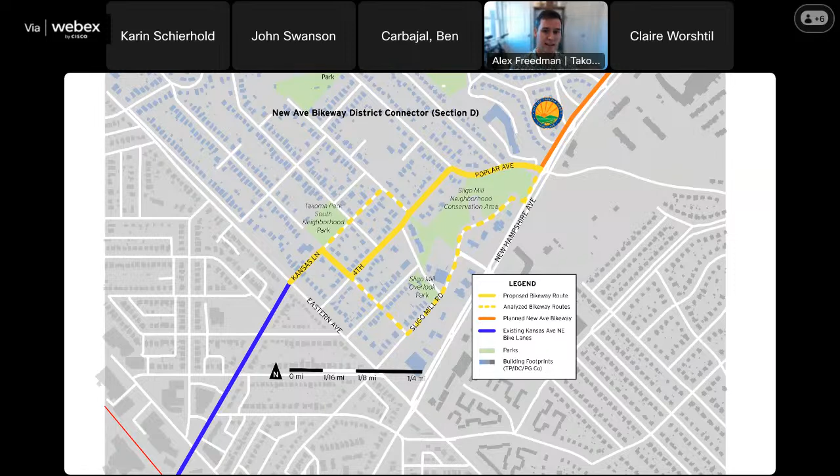As you can see from this yellow route, we explored a couple options and chose the one that was the flattest and most direct, where bike riders were already using it.

We used a lot of the same strategies we tried for the MBT on this project as well, including the yard sign campaign that I was really excited to try out for the first time, inviting multilingual residents to take a survey that would guide our process.

Here's just a couple snapshots of the designs that came out of this. You can see here the extension of the separated bike trail from the previous sections to the north of this project.

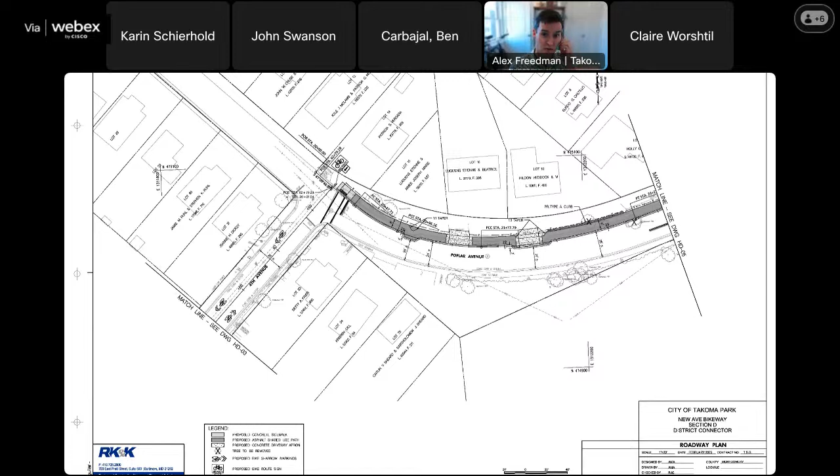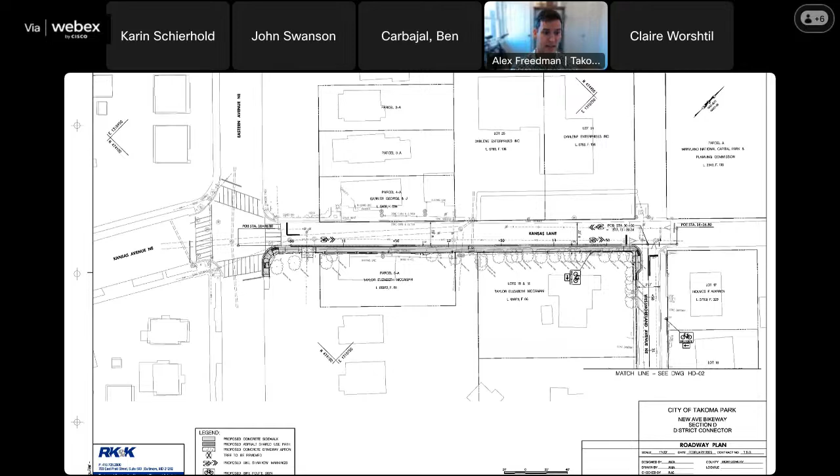And then it transitions onto the neighborhood streets, which we found through a number of counts to be quite low volume, also very narrow. So for that reason, the infrastructure becomes a bit lighter and focuses more on road narrowing, expanding the sidewalk, and adding clearer signage so it's easier to navigate as a bike rider.

For this section, the other two sections of this trail are just about to hit 100% design, which we're really excited about. We're now seeking funding to continue the design work on this section, with hopes to pursue construction funding for this entire 1.5 mile project.

So thank you so much for your time, and that's what I've got. That's great.

Thanks, Alex. Yeah, it's great to finish off with something like this. I think many of these projects are gaining momentum, and you're going to be moving toward real implementation in the very near future. So it's all really great to see.

We have about 9 minutes left for some questions and answers, and I see that people did put some questions in the chat. If our panelists could bring on their cameras, I'm just going to throw out a general question. For local governments or members who are interested in pursuing TLC or the Roadway Safety Program grants and are thinking about applications, do you have any recommendations for them? Any lessons learned on your end? These are really small grants, very focused, quick turnaround. Anything you would suggest, or that you would have done differently if folks are considering applying for one of these projects?